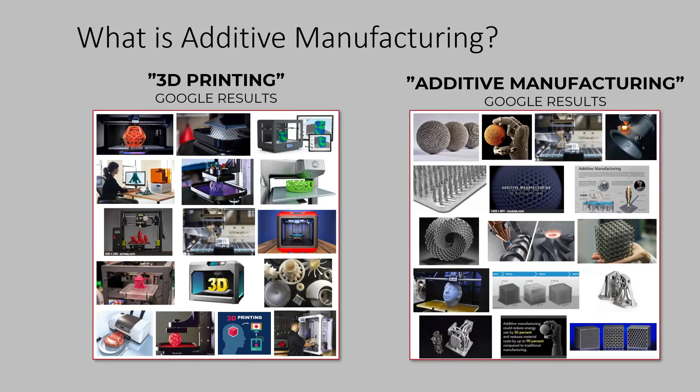What is going on in the additive manufacturing universe? Well, the same things in many cases are happening to you. We had the COVID situation, the Suez Canal, trade wars, etc. Extreme supply chain disruption. And in my opinion, supply chain disruption is the new normal. I think it's here to stay. And as a result of that, additive manufacturing is being forced to be in the forefront as a solution for dealing with supply chain disruptions.

Another thing is every application is expanding in additive, from art and food to production end component manufacturing. Additive manufacturing is a significant part of those industries now. Another thing, as a result of the last thing, is every manufacturing paradigm is being applied to additive manufacturing. So from PPAPs to quality, repeatability, supply chain maturity, all are being worked in additive at a record pace.

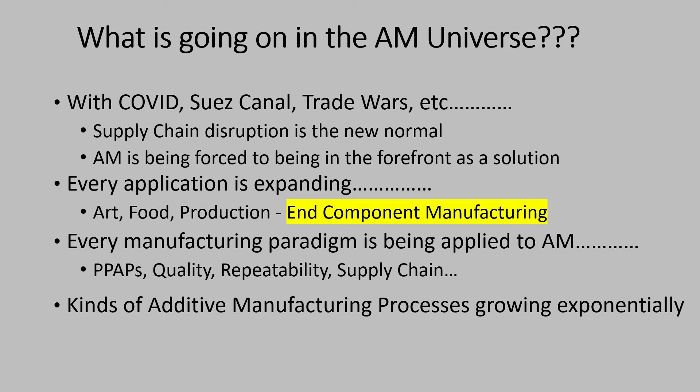Another thing that's happened, because a lot of the patents expired, there's different kinds of additive manufacturing processes, and it's growing exponentially. I try to track the metal OEMs, the companies that make metal machines and sell them, and I'm at about 250 right now. And one of the biggest things that's happening is costs are going down. It used to be you didn't dare use additive manufacturing as a solution because the price was just prohibitive for doing any real work.

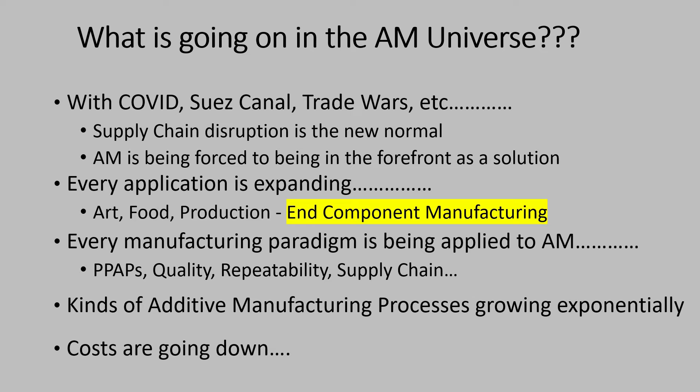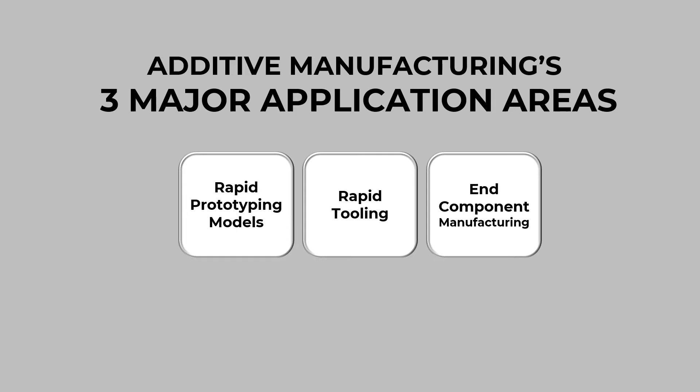If I can, I'll talk about additive manufacturing, 3D printing, in three different major application areas, three different buckets: rapid prototyping, which includes models, rapid tooling, and end component manufacturing. Models is something we haven't been paying attention to lately, but in the additive world, things have really got interesting. We have some machines like Mimaki that can print in a million different colors. So that pizza you're seeing was actually a polymer. And you can do translucent, you can do solid colors, you can vary the tint and hue. It's amazing what it can do.

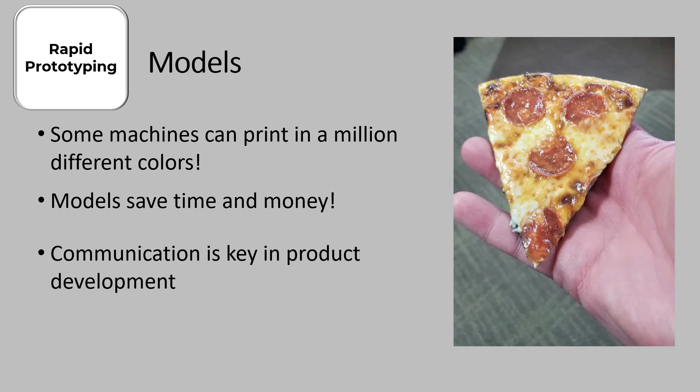Models save time and money. You walk into a conference room, you hand a model around, it really, really improves the communication and the speed of communication. And communication itself is a key in product development. So you can do multiple designs real quick, show them off, get new ideas, and really speed up product development and eliminate errors while you're doing that.

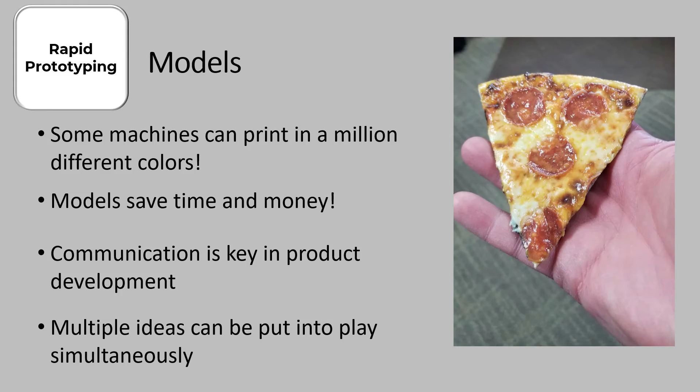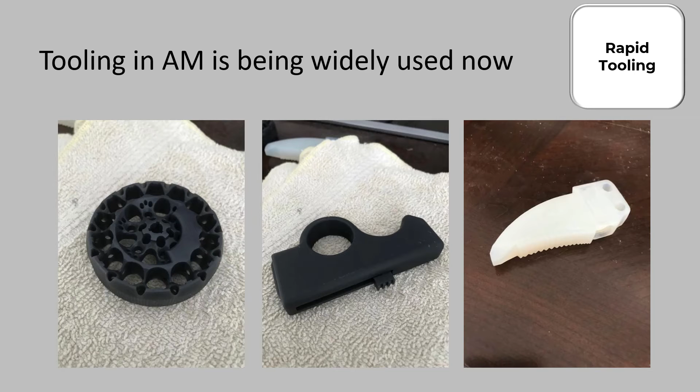Tooling in additive manufacturing is widely being used now. At my former company, Danfoss, we probably did over 300,000 pieces of tooling, especially multiple copies of tooling. It's a very great weapon in doing tooling, and I'll discuss why that is. The reasons for making your tooling out of additive manufacturing.

All the tool files are digital, which is important in manufacturing 4.0, Industry 4.0. They're easily stored and easily modified parametrically. You have the ability to do on-demand tooling. So if you're short parts or a major part breaks, you can literally push a button, which is really not much labor cost from that point, and avoid line closures.

At Danfoss too, in this global world we live in, we can have different areas of the world doing the same production line. And it's easy to put a new line in another place worldwide. The files are digital, we just print them, and you can go from 3 months doing a product line down to 3 weeks. Ergonomics is really coming into play now.

Your tooling can be modified. So you could have a 6'4", 200-pound man on one shift and a 5-foot-7-inch lady on the other hand, and the tooling needs to be different. The people become more efficient. You can do more assemblies per hour faster, and the operator is less sore when you're done.

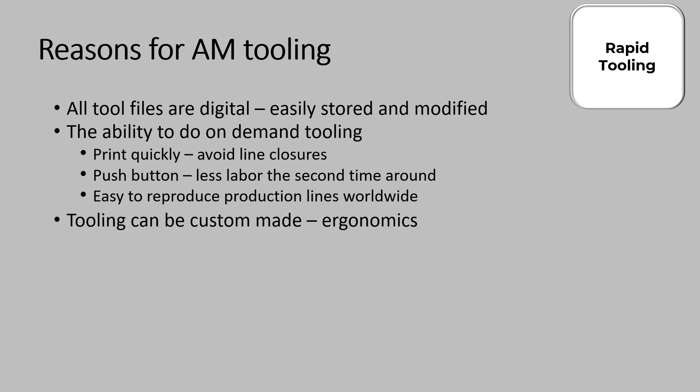There's no geometric limitations, and you can use exotic materials economically, materials like titanium and metal, and long fiber composites in tooling. Also, what's come into the, I don't want to say fad, it's not really a fad at all, but it's being sustainable. Additive manufacturing is very green technology. You use much less waste than other manufacturing processes. One thing we found out at Danfoss, too, the operations staff is much more involved in the design, making changes and wanting to make changes because they know that we can make those changes quickly and cheaply.

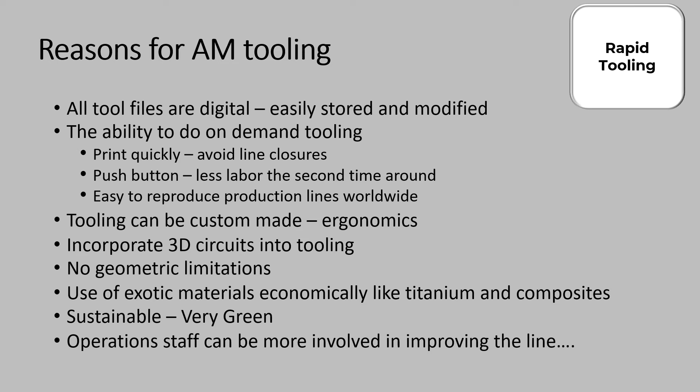Here's an example of a piece of tooling I did in bullets. These are disposable tooling. They're used generally for 20 different assemblies, and then they're discarded, sometimes a lot more. What the bullet does is it fits over a spline shaft on a motor or a pump, and you slide a lip seal over that. If you don't have that guard, the lip seal can nick and cause a leak, which is bad news. Sometimes the nick won't cause a quality problem right away, but eventually it will.

The first impetus was to do this to reduce the cost of the bullet. We went from an average of $125 machined down to $6 3D printed. We improved the quality by having a more repeatable process, and this reduced the amount of shaft seal leaks we had worldwide.

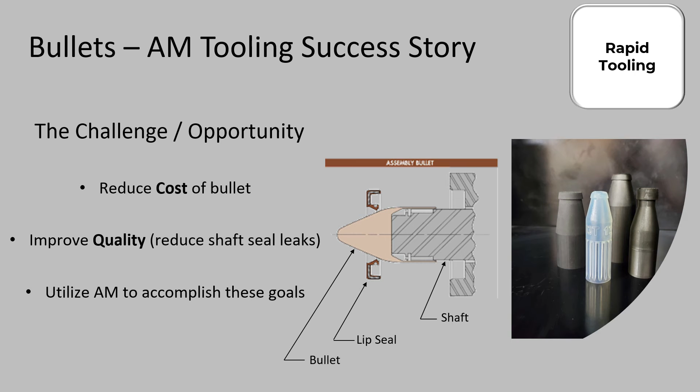We had to develop a cross-functional team with this, and this got a lot of people involved in additive, as you can imagine. We had to study how the bullets were designed, and many of them had been designed 40 years ago. So we had to make a lot of changes. We had to look at different additive technologies. We used a lot of different people to test this out, and the strengths of additive manufacturing and Industry 4.0 to give a final product.

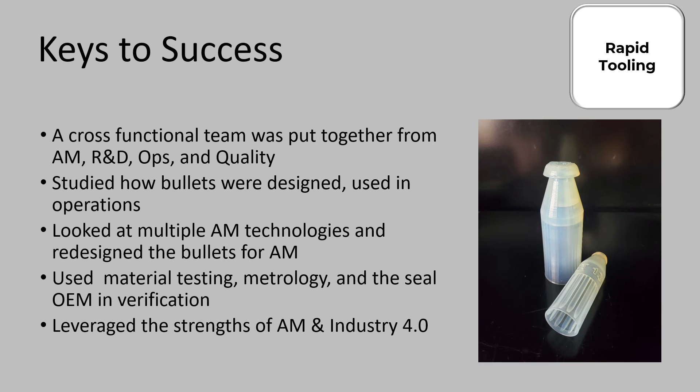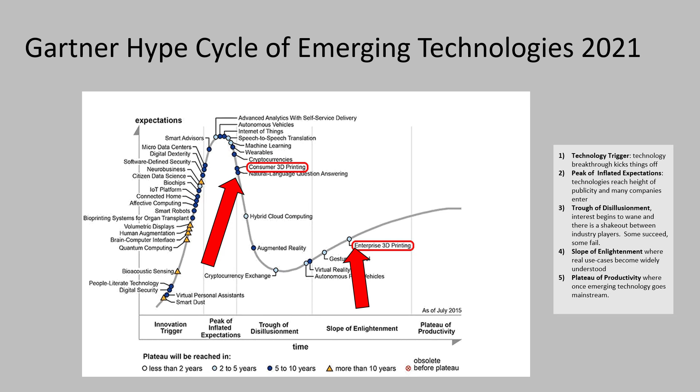End component manufacturing. This is the highest ROI you can see. We first started doing end component manufacturing with additive, especially metal, to get enhanced performance by making geometries you couldn't make any other way. Generative was a big part of that, making these generative designs. And really the designs that come out of the generative design software primarily can only be made with additive. So it's a mutual symbiotic relationship that's forming this way.

And we went after small production runs too. At Danfoss, we were able to do small production runs to keep lines going. And even though the cost normally would have been prohibitive, we were able to keep the lines up. It actually saved us money. And there's also some penalties we were incurring per day from some of our customers because we wouldn't do that.

But one thing I want to talk about that's really interesting is things have really changed in this world. 3D sand printing of molds has sped up. The printers are becoming cheaper. The price of sand is cheaper. Where you put them in a foundry is at the end of the foundry instead of the beginning, and that's where the bottlenecks are, in the beginning, usually in a foundry. And you're able to competitively price printed castings.

And the quality of the castings is much better. So you have more dense castings and you have less porosity in the castings, so that you actually have a much higher quality. My friends at Chrysler and Ford are going completely to sand printing for the future in their castings.

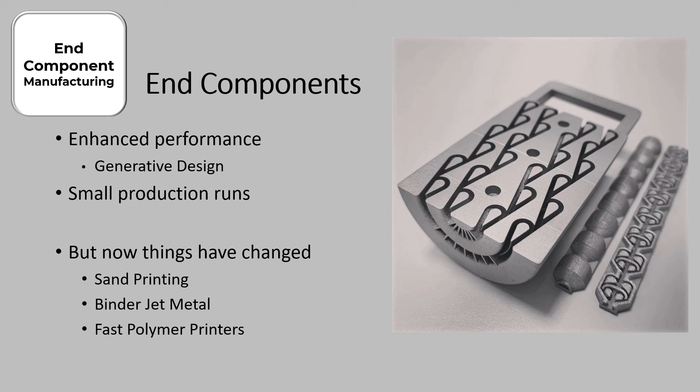Binder jet metal is taking off and things are becoming better on dimensional control, but you can print parts more cheaply, especially parts that are basically 2.5 dimensions. But you can still print internal channels and things like that. And binder jet metal uses powdered metal or MIM directly in their machine, so you get a lot more alloys than are used in conventional additive manufacturing metal. And we're seeing a lot more fast polymer printers that are rivaling the speed and cost of injection molding with no tooling.